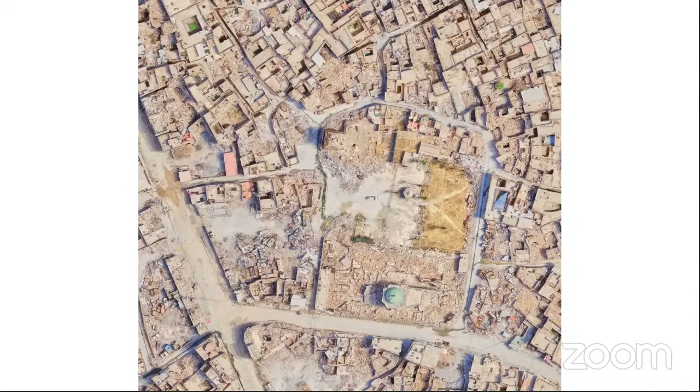So then this dawned upon us that should we try to be another intruder to the child, or should we try to take a back seat and just be a facilitator and try to provide whatever is lost. So our design intervention started with finding out what is lost, and if there is some way we can give what is lost back to the child.

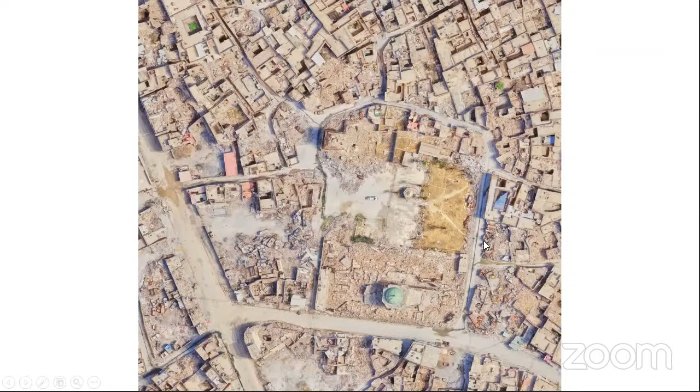These are some of the points that we have anticipated, imagining the situation there. We felt that the rebuilding approach is simply to erase the painful memories by giving her these few things back, such as endless alleys, embracing terraces, intimate courts, and her river also full of stories.

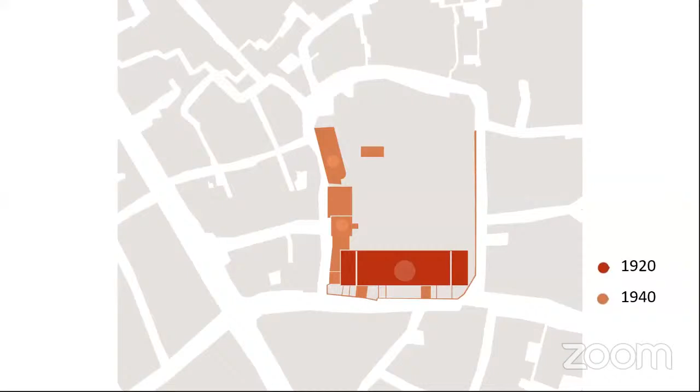Then in the 1940s, we found out there were structures connecting the Al-Hadaba Tower in the north and the prayer hall in the south, and we allotted all the ancillary functions into these, such as the ablution tank and service rooms, etc. There was an open structure behind the mosque, which we retained too, which helped the mosque buttress structurally.

This shows 2017, the last remaining structures - 3 houses on the left hand side, which was supposed to be part of the school, the main mosque in the center, and smaller fragments of structures in the surrounding.

So the proposed intervention also follows the organic pattern and tries to create an enclosure to form courtyards in the center.

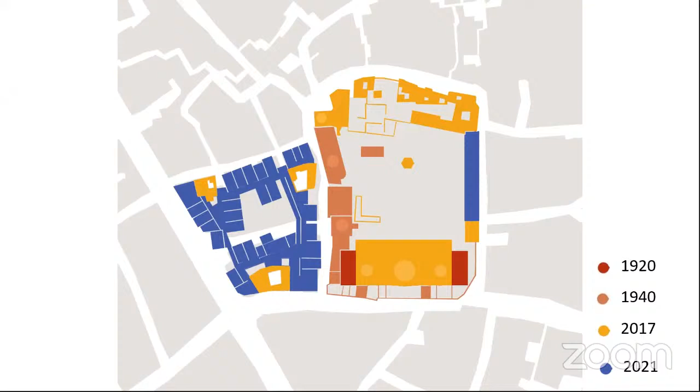We were not extremely careful in trying to preserve the geometry or align the areas onto each other. The idea was that, just like the surrounding development which is unself-conscious, we would let this develop in the same way, so that it doesn't become another alien element in this context.

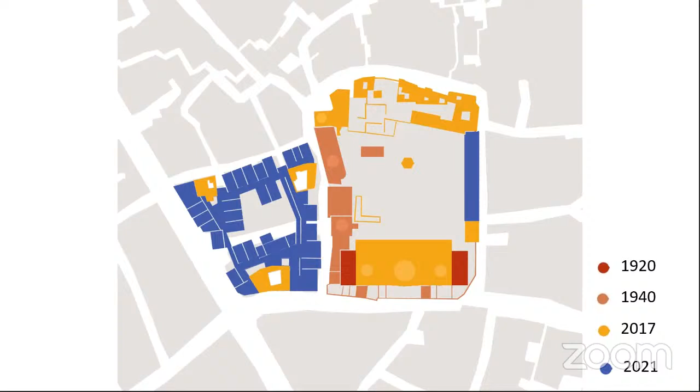Then, after the built structures, we started identifying all the earlier landscape footprints, starting from this big chunk on the right hand side, which we have revitalized with all the similar trees that existed before.

There was a small portion of shrubs here which will be retained, and there was a requirement for a large congregation and gathering space.

So there were terraces cascading down from Al-Hadaba Tower, which we proposed as an extension to the court, which can be used as an amphitheater. The void in the center of the school becomes a dedicated playground for the children.

The voids behind the mosque are treated as walled courts, which have a walkway running through and connecting to the pedestrian path of the main street.

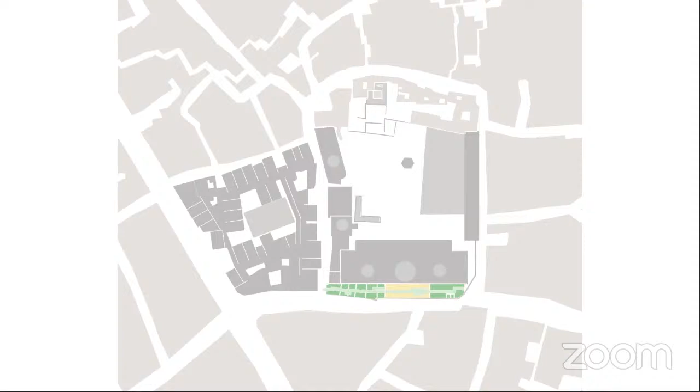Rather than walling off the mosque area, we have tried to make it part of the city as far as possible, and have free access as it existed long before.

Then comes the part of water. What we realized was that, being on the banks of the River Tigris, water since times primordial has been a way of life.

It was not considered sacred. It was basically that the city developed around water, and this element, which is an extremely soothing element and a way of life, has also been forgotten.

So we bring back small amounts of this element onto the site and create water pools at different levels, meant for the child to play in.

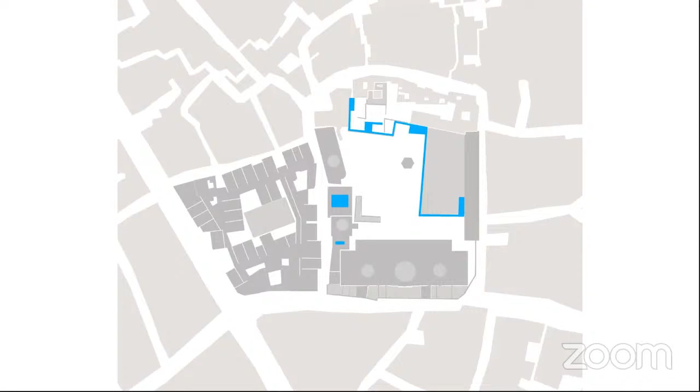In small traces, as a soothing element also to the traumatized child, we bring it back onto the site. And that's what you see.

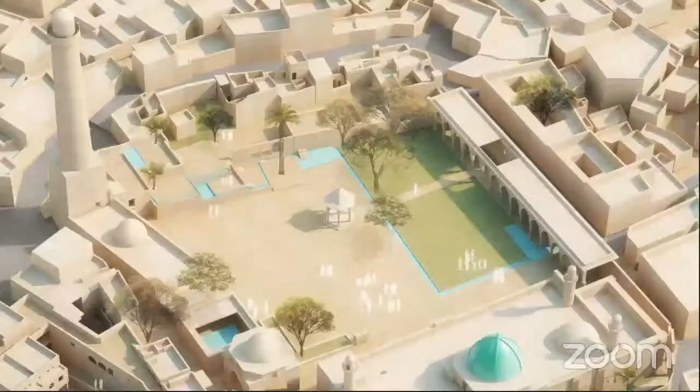It's flowing water, very small in quantity. It is not making any sacred gesture. It is meant to be a playground for the children.

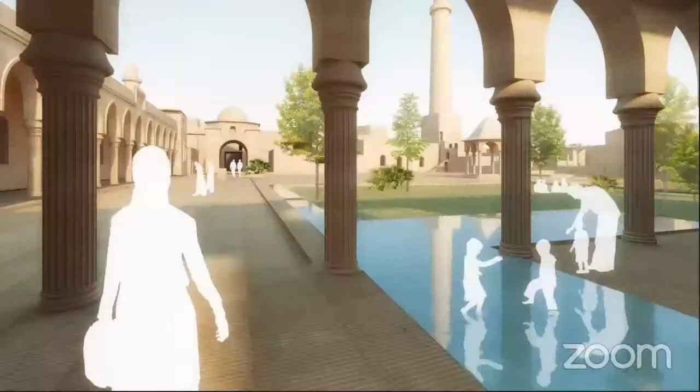This entire courtyard with the green and the water becomes a place for play. So basically, the kids take over the prayer hall.

So the landscape is imagined as a multifunctional space, which belongs to the city more than to the prayer hall.

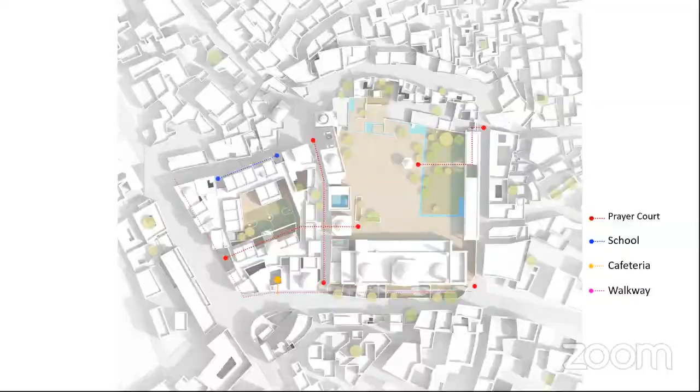There's no differentiation between the new and the old here. We also tried to retain some of the old walls as elements in the design.

So they become important features within the new school, and they have been left as is, simply restored and kept as an element.

So these three heritage houses are allotted common facilities such as a library, canteen, and tea houses.

On the west, there is a main access street to the prayer hall, which bisects the academic block into two.

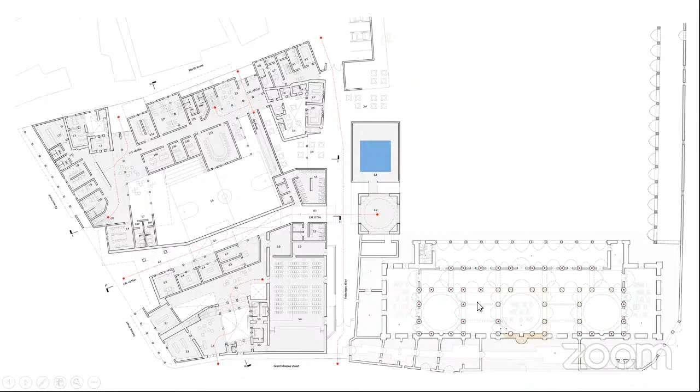All the academic functions are primarily laid out on the upper levels. This corridor, the staircase corridor and a ramp, indicates a continuous loop of vertical and horizontal circulation.

This playfully connects the open-to-sky courts and terraces, semi-open verandas, and enclosed spaces together.

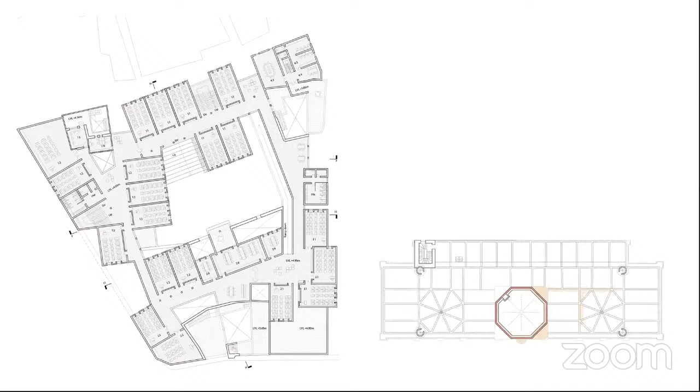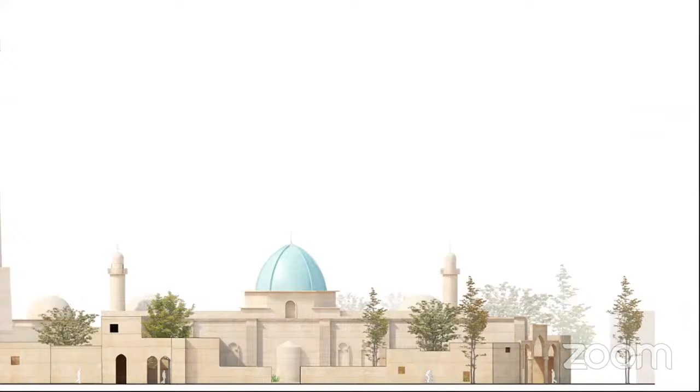This is the main street elevation, Great Mosque Street. Here we can see the process of building on past lines made the intervention totally indistinguishable, blending into the fabric easily.

The idea is that there's nothing taboo here. It's like a child's play, as creative, however without definitive rules. So materials are not taboo - whatever is convenient and easy to build is used.

The same thing applies for the restoration of the Great Mosque. Since it was in plastered finish, it was very easy for us to devise a structural system which could be easily hidden within the existing structure, and it could be rebuilt from that.

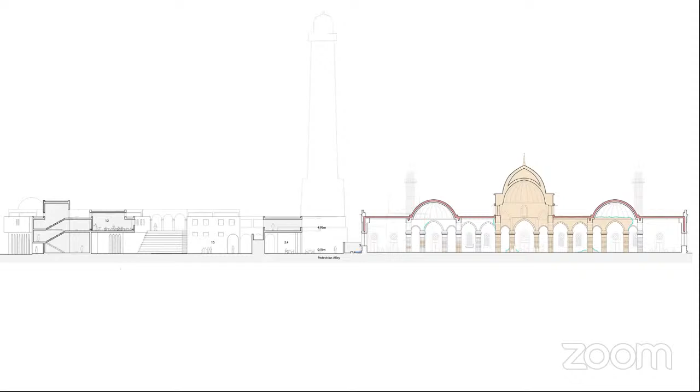So what we are proposing is a concrete layer, superimposed onto the existing structure, and the rigid pins from the roof come down and meet the column to whatever level they are today.

So wherever the columns have been retained, we start the structure up from there and tie it all together when it reaches the roof. The domes could be strengthened very easily by making concrete rings around them.

In any case, it is all going to be plastered - not exposed stone or any visible joinery. So we bring it back to its original shape by simply having locals building it right there. We don't need any expertise; it is appropriate technology which is available at any given time in this place.

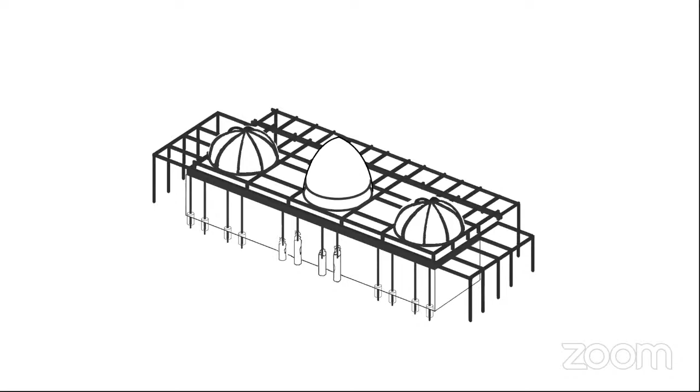To conclude, we have used simple and appropriate technology, as Gurji just mentioned, which allows the city at large to participate. We have welcomed everything here - variations, deviations from the blueprint - which also add to the character of the city. We have imagined inhabitants as the stakeholders of the entire city.

The central building functions as an open construction workshop for rebuilding. This is one of the thoughts. You can point out the central building workshop - yeah, it's somewhere here.

So finally, the familiarity with the traditional is to curate her identity and not to create a new one.

That's it. Thanks, Awal.